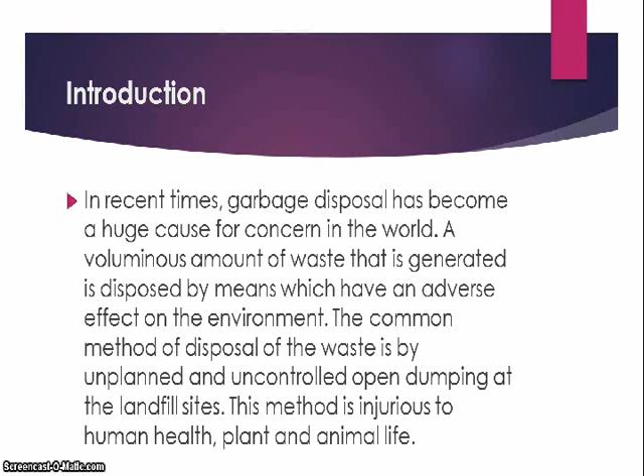Introduction. In recent times, garbage disposal has become a huge cause for concern in the world. A voluminous amount of waste that is generated is disposed by means which have an adverse effect on the environment. The common method of disposal of the waste is by unplanned and uncontrolled open dumping at the landfill sites. This method is injurious to human health, plant, and animal life.

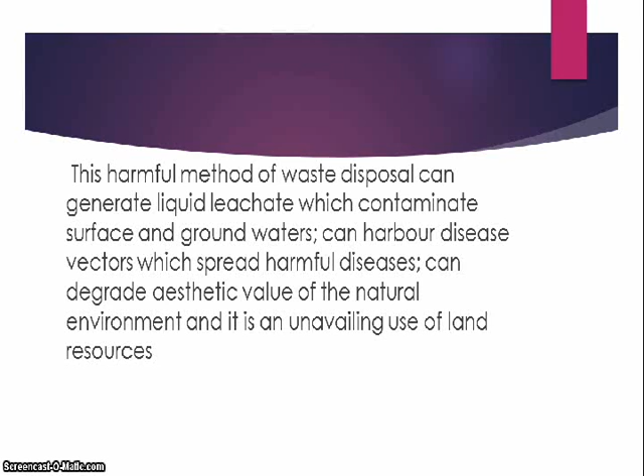This harmful method of waste disposal can generate liquid leachate, which contaminates surface and groundwaters, can harbor disease vectors which spread harmful diseases, can degrade aesthetic value of the natural environment, and it is an unavailing use of land resources.

What is waste management? Waste management is the generation, prevention, characterization, monitoring, treatment, handling, reuse, and residual disposition of solid waste. There are various types of solid waste, including municipal or residential, institutional, commercial, agricultural, and special or healthcare, household hazardous waste, sewage sludge.

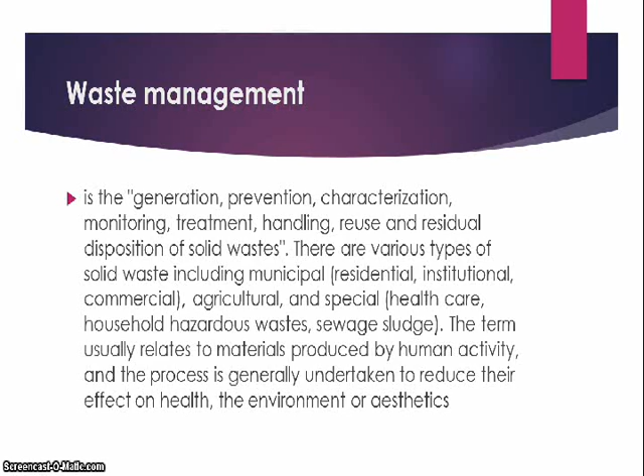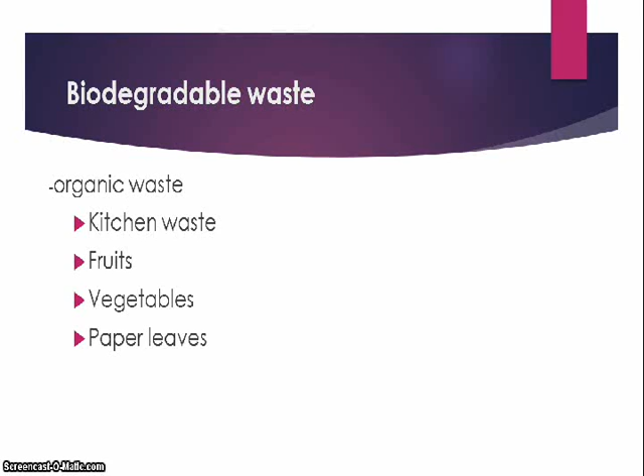The term usually relates to materials produced by human activity, and the process is generally undertaken to reduce their effect on health, the environment, or aesthetics. Waste can be segregated as biodegradable and non-biodegradable. Biodegradable waste are organic waste. Examples are kitchen waste, fruits, vegetables, paper, and leaves. Non-biodegradable waste can be further segregated to recyclable, toxic, and soiled.

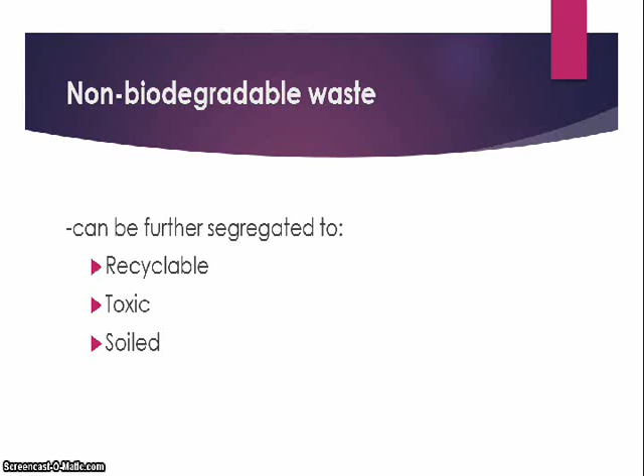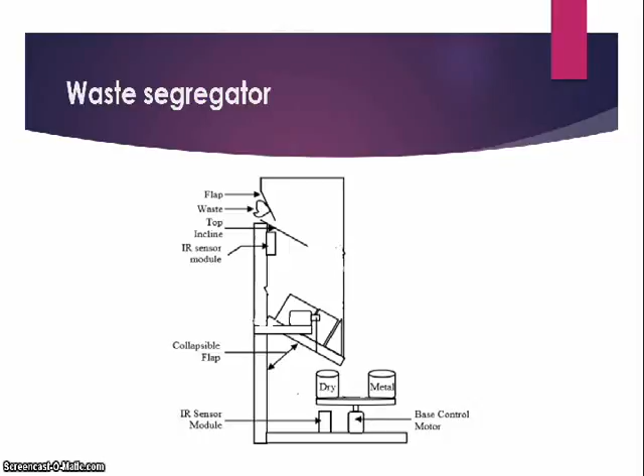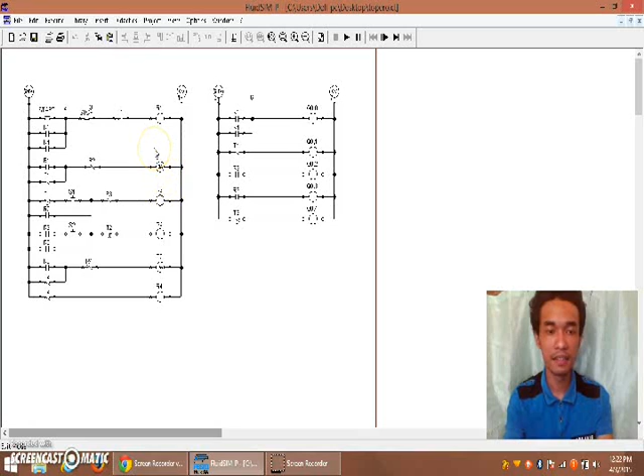This is the ladder diagram of my automated waste segregator. As you can see in this ladder diagram, when you push the start button, relay 1 will be triggered and the flap will open, making the waste material fall into the collapsible flap. The timer 1 will then start. The flap will remain open for 2 seconds. After 2 seconds, the flap will close.

The sensor 1 will then start sensing whether the waste material is biodegradable or non-biodegradable. After the sensor 1 identified the waste material, relay 2 will be triggered and it will make the motor start. The motor will head to the direction of the sensor 2, and the sensor 2 will sense whether the proper container for the waste material is in its proper position.

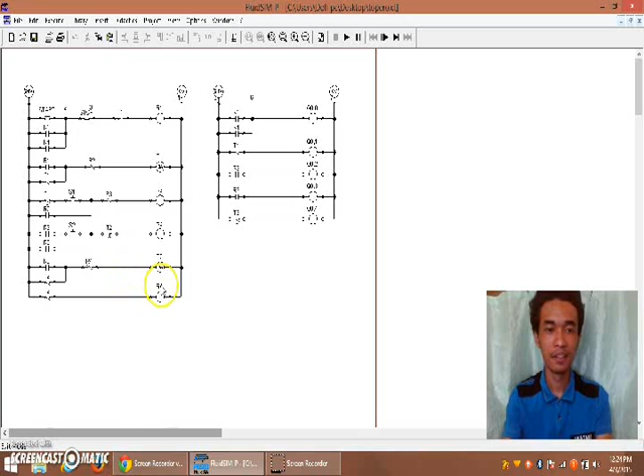Relay 3 will then be triggered and the motor will stop and the collapsible base will open. The waste material will then be dropped to the container. Timer 2 will start and the collapsible base will be open for 5 seconds. After 5 seconds, the collapsible base will close. The relay 4 will then be triggered and the process will repeat itself.

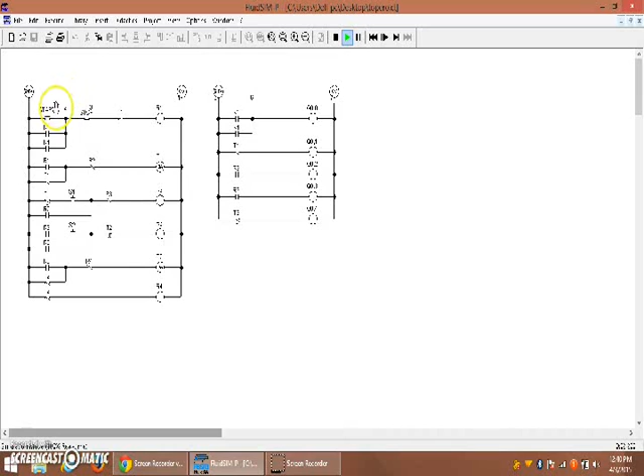This is a FluidSIM presentation of my automatic waste segregator. In here, you will see how it works. When you push the start button, the R1 will be triggered and the flap will open, making the waste material fall into the collapsible base. The timer 1 starts and the flap remains open for 2 seconds. After 2 seconds, the flap will close.

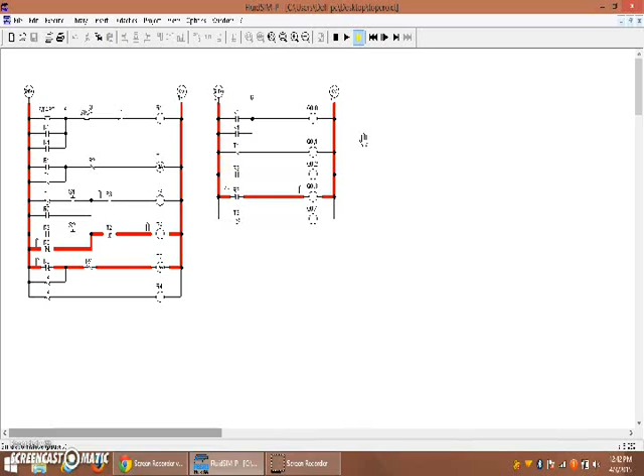The sensor 1 will then start sensing whether the waste material is biodegradable or non-biodegradable. After the sensor 1 identified the waste material, relay 2 will be triggered and the motor will start. The motor will head to the direction of the sensor 2. The sensor 2 will then start and it will sense whether the proper container for the waste material is in its position.

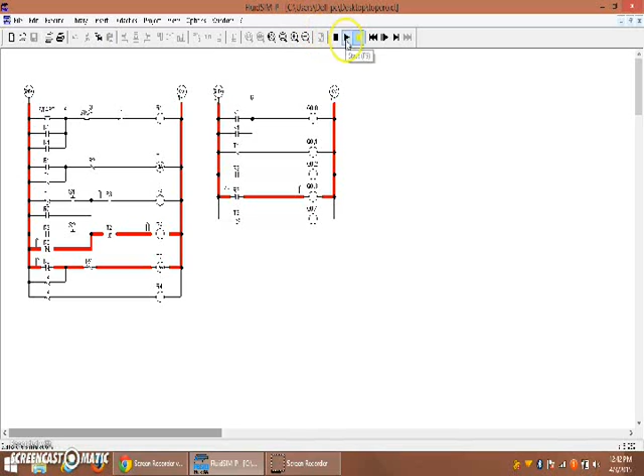R3 will then be triggered and the collapsible base will open. The waste material in it will fall into the container and the timer will start. The collapsible base will remain open for 5 seconds. After 5 seconds, the collapsible base will close. And then, R4 will be triggered and it will make the process repeat itself.